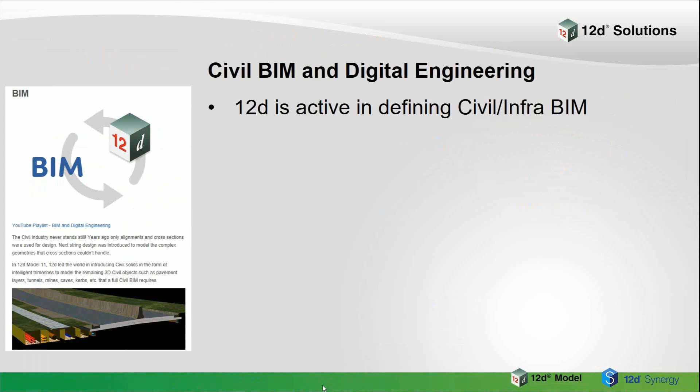But we've been very active in the international community in defining civil or infra BIM. These are the extensions to allow us to handle civil data, rather than most BIM which has really been about buildings, i.e. vertical, where this is horizontal. So we've been attending the Building Smart International IFC Summits, which is the place that goes to define the IFC standards for open BIM - the IFCs that people are supposed to use for infrastructure. So that's been very important.

We've also been an active participant in what they call the IFC Model Setup, IDM. Now what that's all about is telling you how you should set up a large project. Normally BIM is just in a very restricted area. This is, well, how do we handle it when we've got something like a large road or a large railway job, and you've got all these scale factors and other horrible things coming in.

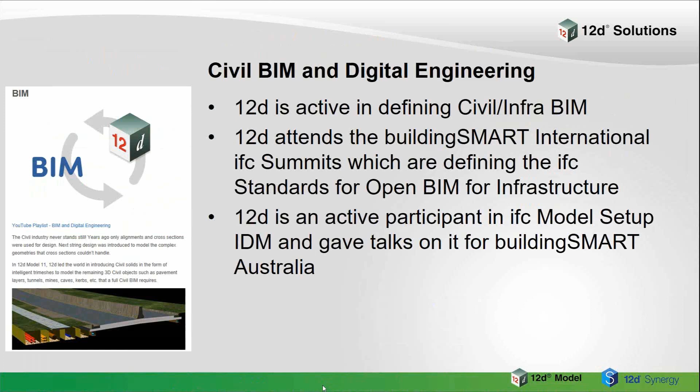So the IDM is the Information Delivery Manual. It's to tell you how you can set up such a project. And we've been giving talks for Building Smart around Australia as part of that.

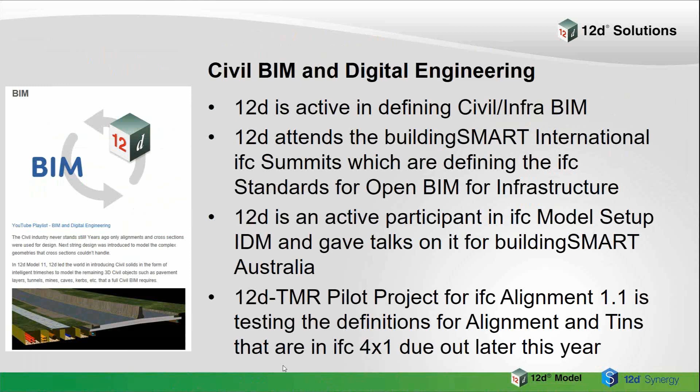We also have a pilot project running with the main roads in Queensland, TMR, where we're actually looking at what's called IFC alignment 1.1. What we're doing is reading and writing in 12D Model so we can test out the definitions for alignment and tins that are coming out in IFC 4X1, which is due out later this year. So we're ahead of the game there by quite a way.

Here's an example from that pilot project, which we presented over in London, and previously in Korea. So you can see it's hard work here. The next one is in Paris, but someone has to do it.

In this case, all our data there on the left-hand screen includes tins, all the solids for under the roads and things. There's also a drainage network in there and a sewer network. They all now, with IFC alignment 1.1, can be written out, and then on the right-hand side, we've read all the data back in. So you can see now virtually all the things, most of the things that we're going to have in 12D Model will be able to be written out to IFCs once the IFC alignment 1.1 is released. There are a few things I'm missing.

Things like super tins don't exist in the IFC definition, and it's a little bit vague that you really can't have segment and vertex attributes. So you really can only have string attributes, but those are the things we're discussing and what else can go in.

So with that particular job, we can get all the strings across, including drainage strings, the alignment string, super alignment - I hear, we're talking about super alignment when I say alignment - and also tins go happily across. Once the data is read back in, you see there we've just done the shade, it all comes in quite well. Some of the colours at the moment we're just working on where they get lost, but the main thing is the data essentially goes across.

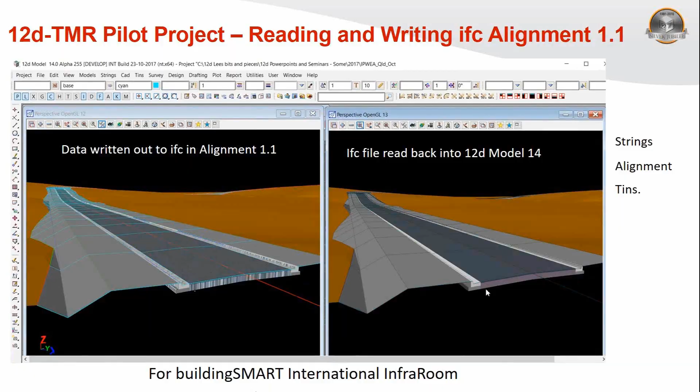For 12D Model 12, which was actually released at the conference, but we've continued to update it, and they're what we call subversions. So you would have seen we talk about 12D Model 12 C1A - that was the very first release of it. Then we've got C1B, C1C, and so on.

Now these subversions are for a couple of reasons. One, we can make bug fixes as we find them, because we can't test everything to oblivion. We can make bug fixes, but also there's extra features we put in there because when we first release the product, there might be something that we weren't able to do at the time, or new things have come up that you need and can't wait till the next release for.

Although we say there's a 2-year release cycle for the major thing, there are these continual update versions along the way, so you are getting increased functionality and maintenance with these extra sub-versions that we put out. For example, for version 12, here are things we've added since C1A.

Some small things in ADAC, which is for getting data in - ADAC is really a BIM system from the IPWEA, we have the standards for that. It had ADAC 4.0 to start, but during the year 4.2 came out, so we've added that to version 12 so everyone can use it.

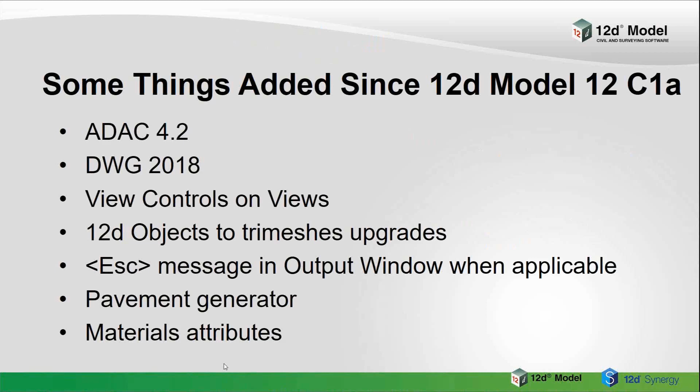Similarly, there's a whole lot of things Paul's actually done there with materials and attributes and collecting information, again a lot of it going out to BIM systems.

We've added tri-mesh head walls into the drainage.4D file, and that can then be used by the 12D objects to tri-meshes, so you can get much more accurate work there.

What's happened with the drainage side is now with BIM, people are all of a sudden wanting very detailed models of things, where before they weren't so worried - they were just doing analysis. So we're adding all those sorts of things in so you can model these things to the nth degree. Unfortunately, that often means you need more parameters in there to control it, but we're getting there.

We have weights for highlighting, so that you can make the things that highlight come up in a higher weight so it's easier to see them.

There's a little blue star on the view that just pops up the view positions. The idea is that you're not setting the view positions - that's done under that yellow star on a view - it just puts up the list so you can quickly pick the view positions rather than have to do a walk right list.

With Drainage 2D, there's actually a 30,000 wet cell version available free of charge, so you can run things like road flow, up to 30,000 wet cells without having to pay any money, and see how it can actually do the work for you.

Because over time, most drainage analysis - looking at where the water is going above the ground - will be done in 2D once they can get the computing times down for it. And then once it goes through into the pipes, we use our dynamic drainage analysis, so the two are hooked together - the terrain will tell you where the water will go and how it will then flow through the pipes, and you won't have to make all these 1D approximations.

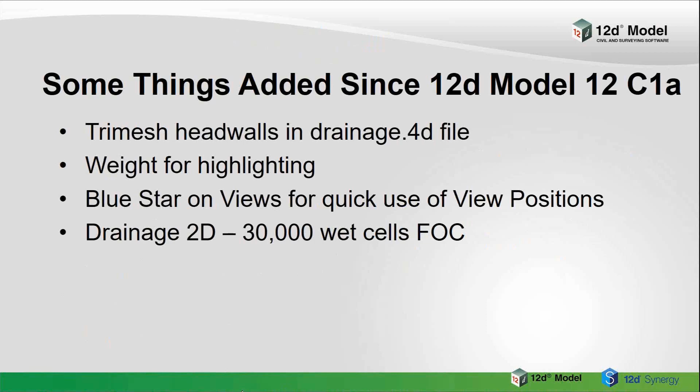So there's a 30,000 wet cell thing there for you to play around with for road flow to get some ideas of how it's going to work for you.

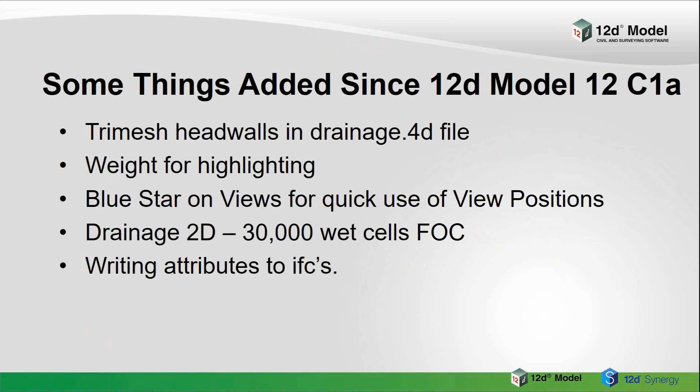We can write our attributes out to IFCs. So as people know more about BIM and what they want, we've been doing more things such as all the 12D attributes, and we're just now upgrading our IFC Express Writer, so you can nominate what property sets, as they call that they want, what names they are, and what attributes you want in it to go out to your BIM objects.

With 2018, we are working on 12D Model 14, and we're doing some of the things hopefully you've asked for. There's hundreds of these things, but I'll just mention some of the big ones.

The multi-page plots, now this is basically a major enhancement to MPS, what was called the multi-page sheets. And it's going to be a major thing where you can break all your plots into your book and chapters and pages and set things automatically that then run right through. If you set it for the book, it'll work for every page and so on. So I think you'll all enjoy that for producing plots from 12D.

There's always more plot parameters going in. So we look through your wishes and things and add plot parameters in, hopefully so you can get away from manual drafting. And always let us know. The more we can do more automatically, then the less you have to do in drafting. So we're always happy to hear of the extra plot parameters we can put in for you.

We're putting in an IFC writer. Now, IFC, as I said, that's industry foundation classes. That's what has to be used for open BIM. So in the BIM world, that's where it has to be used. The whole idea of BIM and open BIM is that you don't have just a proprietary software package format. And the IFC is what's supposed to be used internationally. And the Queensland government have issued last year to say that the government is all moving towards open BIM in Queensland, and so they will need IFCs.

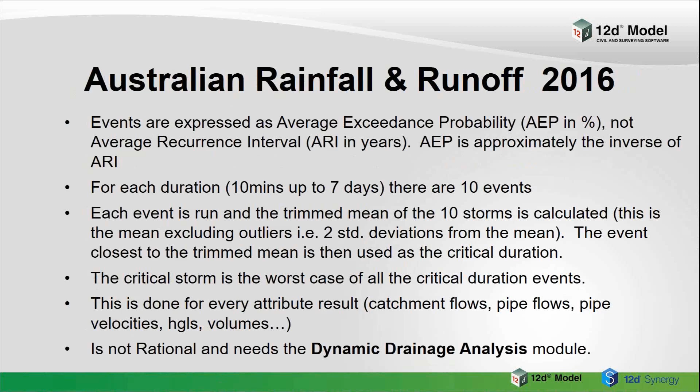So there's big changes there, and this is not a rational method anymore - you have to have the dynamic drainage analysis module to do it, and it's going to take about 10 times as long to run because you have to do 10 events rather than one. It's a big change for people, but it'll come in - really moving people off the rational method for drainage to dynamic drainage analysis.

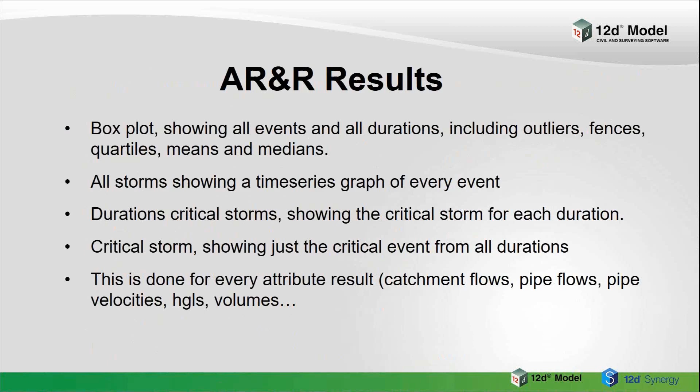So for it, we've got all sorts of results - box plots, storms, the sort of things you had before. For AR&R 2016, you'll be able to more or less pick the same options. You won't have to make too many changes except going to get the data, and you'll have to watch it run for longer. You'll be able to get various box plots showing all the 10 different runs, showing the outliers and where the average is that we've used.

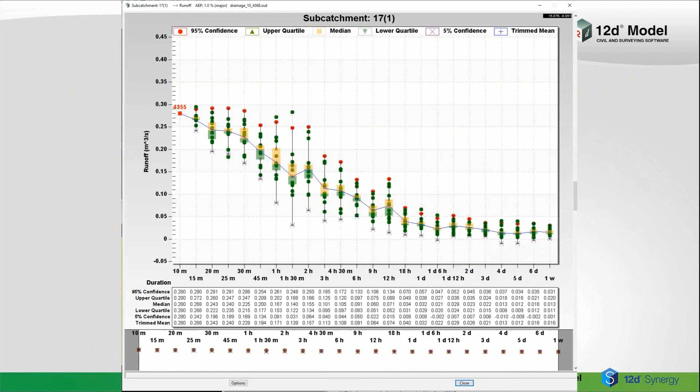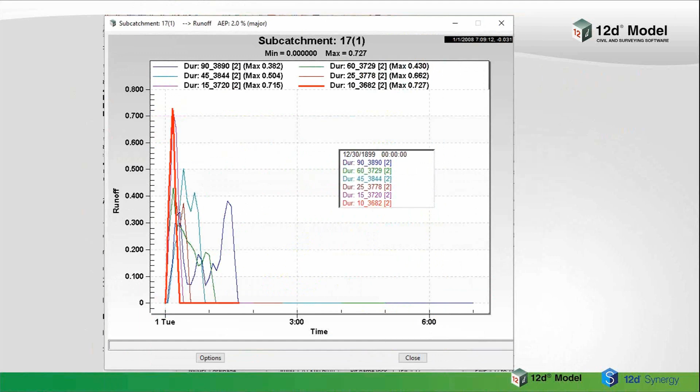Similarly, there's hundreds and hundreds of storms, and we run through all this data and work out the ones used in your reports. So that's the major thing - you'll need dynamic drainage analysis, and you'll have a bit more patience because it'll take at least 10 times as long to run.

We're going to have a 'what's coming in 12D Model' webinar, because 12D Model 14 will be released at the conference, but we'll at least have a short webinar first, just to say what's coming before the conference, so you know what we're going to be doing there. There'll be an industry solutions webinar early this year talking about what is coming in 12D Model 14.

Now, 12D View has been around and talked about for a long while. We've done a 12D View 12, which we've been putting up on our 12D Model forum so our users can test it and come up with suggestions for improvements. It really is basically now a cut down version of 12D Model, so the views and section views are all there. Originally we were writing it as a totally different thing, but we found that was too difficult, so we're basing it on 12D Model, so you all know how to use it.

It is going to be free, to look at 12D Model projects. You can use your existing 12D V12 nodes file and dongle. So if you've got a dongle, 12D View can run - you don't have to do anything at all, it'll use that and know it's okay. It does not take a license for those dongles, but if it's there, it can check that you've got an actual running version of 12D Model 12, and therefore you can run 12D View.

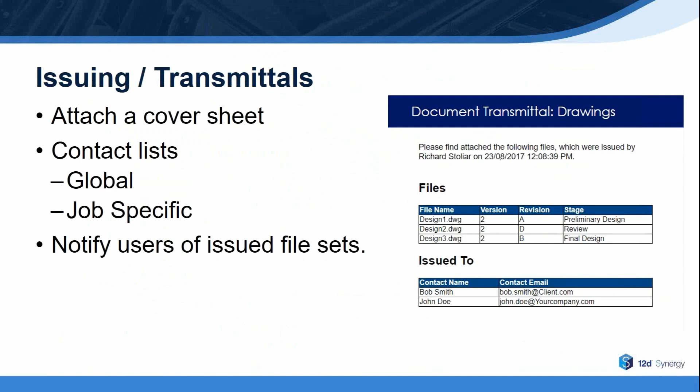On the outside, there's a whole lot for issuing and transmittals. This is where you can attach a cover sheet and use global lists and job-specific ones to send information out to people, notifying users of issued file sets. It looks after all that sort of stuff for you.

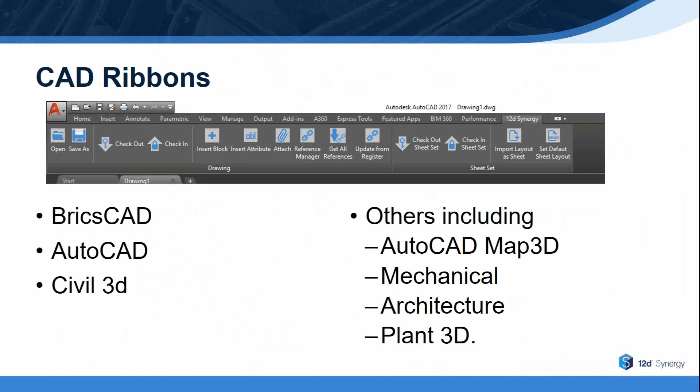There's CAD ribbons in various products like BricsCAD, AutoCAD, Civil 3D, and others including AutoCAD Map3D, Mechanical, Architecture, and Plant 3D. So you can access Synergy right from the ribbon inside those products.

With referencing and XREFs, there's support for the new reference types for DWG, images, PDF, point clouds, and data links. You get notifications when the references on the server change, and there's the ability to check out and edit reference DWGs.

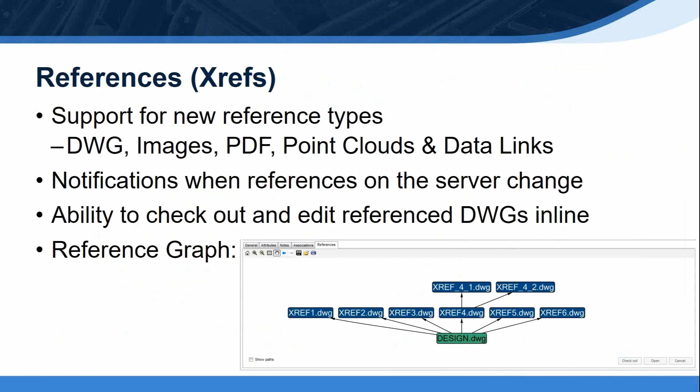And there's a reference graph. With the DWG, it shows you a little graph of where all the reference files have come from. Very good when you've got a complicated thing to see where all your information has come from.

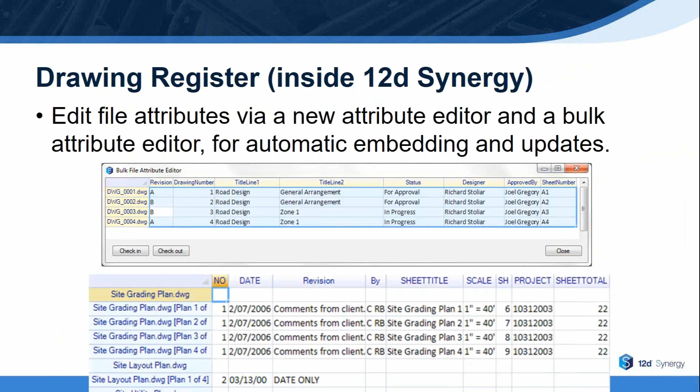With the drawing register, you can use your existing spreadsheets, or you can have your attributes with a single attribute editor inside 12D Synergy, or there's a bulk attribute editor. These allow for attributes which are automatically embedded and updated.

The sheet set manager—a lot of people want their sheet sets looked after. It's automatically updated when changed on the server, and you're prompted for check-in and check-out of sheets within the sheet set. You can import sheets from 12D Synergy.

With Civil 3D, all the above functionality is available, plus data shortcuts, so it automatically downloads the latest version of your data shortcuts into your workspace as required.

With workflows, a very big thing people are getting into inside 12D Synergy—workflows tell you what you're allowed to do, and whether you have to do this or that. A lot of people are using it for their QA systems, forcing compliance, and a number now use 12D Synergy for their QA and have it passed for ISO standards. So we allow you to much more easily put together common processes with gates and things like that.

You can compose your actions graphically and show them—so you can say lock a file for review, or assign the workflow and email the reviewer, and so on. They're much, much improved for 12D Synergy 4.

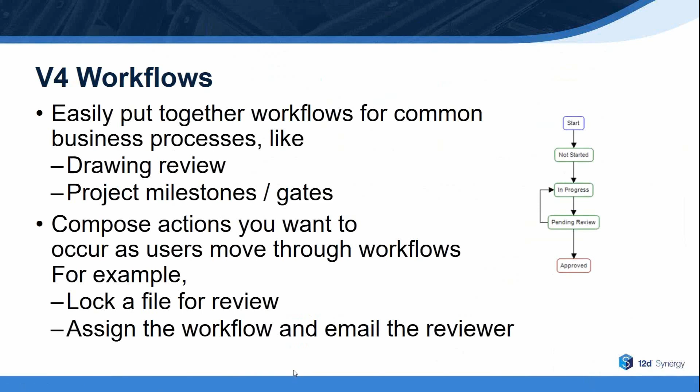There's enhanced reporting—new reports shipped out of the box, a new report scheduler to automatically email and save reports, and a whole lot of dashboard gadgets for looking at the information.

For 12D Synergy 4, there's a spatial search. You might say, show me all the other jobs that are within 500 meters of my current job. It'll go grab and show you an image and put dots and things on there for what these various jobs are.

So you might want all the dial-before-you-dig reports before you go out for that. If you've got that information with spatial data attached, you can do spatial searches.

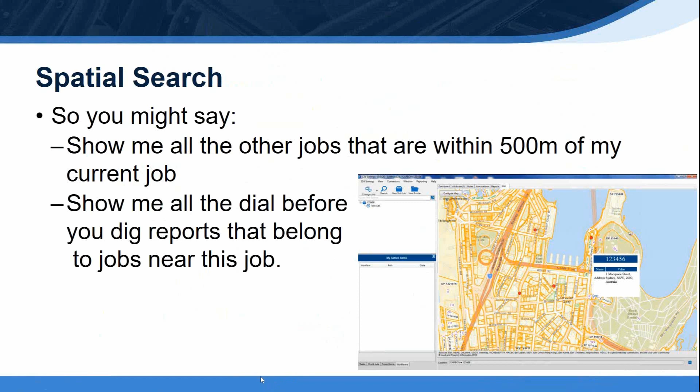There's going to be a what's-coming-in-12D-Synergy-4 webinar, because 12D Synergy 4 is actually now in beta. For a whole firm to go onto 12D Synergy, it affects more than just your 12D model users, so we really have to give it a good test before it ever gets out there, because your whole company—or usually a much larger set than just your 12D model users—has to go onto it.

So it's being hammered on now, getting ready for the conference. It is in beta, and it's going to be released at the 12D conference in 2018. But there will be an industry webinar coming up early in 2018 just saying what's actually coming in 12D Synergy 4, so you can go to the conference and hear more details about it.